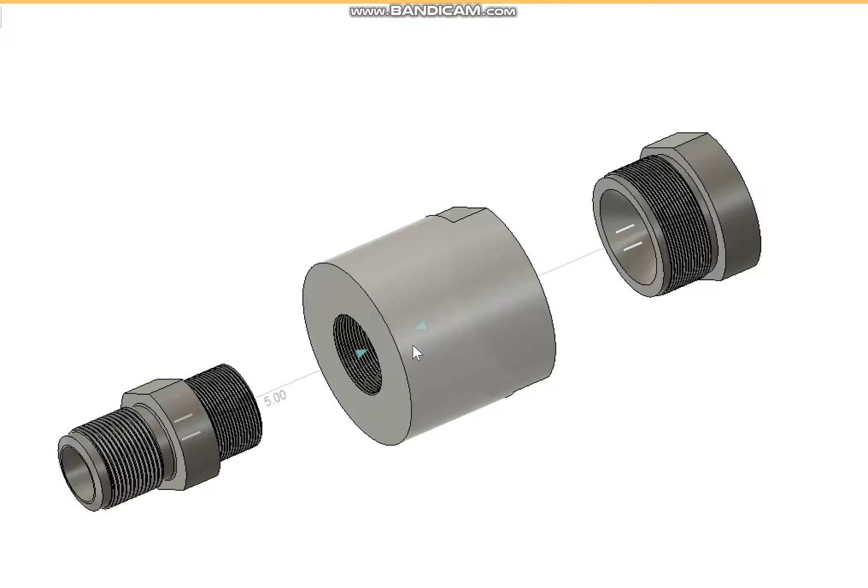So if you quarter, because I need both the male part of the filter pack and a thread adapter, if you quarter the difference between the 1/2 inch hole and the 2 inch thread, the 55 millimeter, you end up with 3/8. So you got a 1/2 inch hole, 3/8 on both sides for the adapter, and 3/8 on both sides for the filter pack. The filter pack then would be 1/2 inch plus 3/8 plus 3/8, so 1.25 inches.

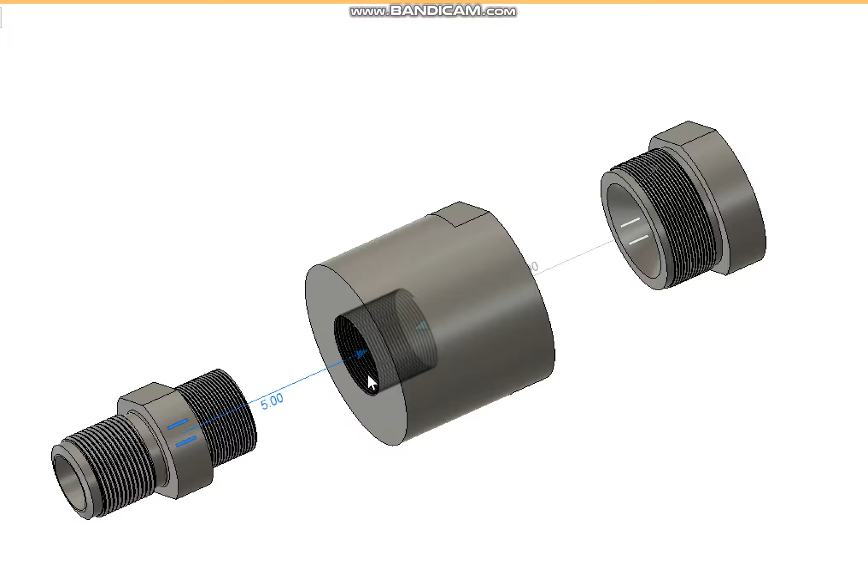So you're going to have a 5-inch diameter piece of steel with a 1.25 inch thread. I was pretty sure that's going to break off. So to get around the problem, the adapter for the machine needs to be a nipple, male on both sides. And then the female goes inside of a universal part that we'll call the filter pack. And then of course the caps have always been interchangeable. So this is what you currently are running on line 10 right now.

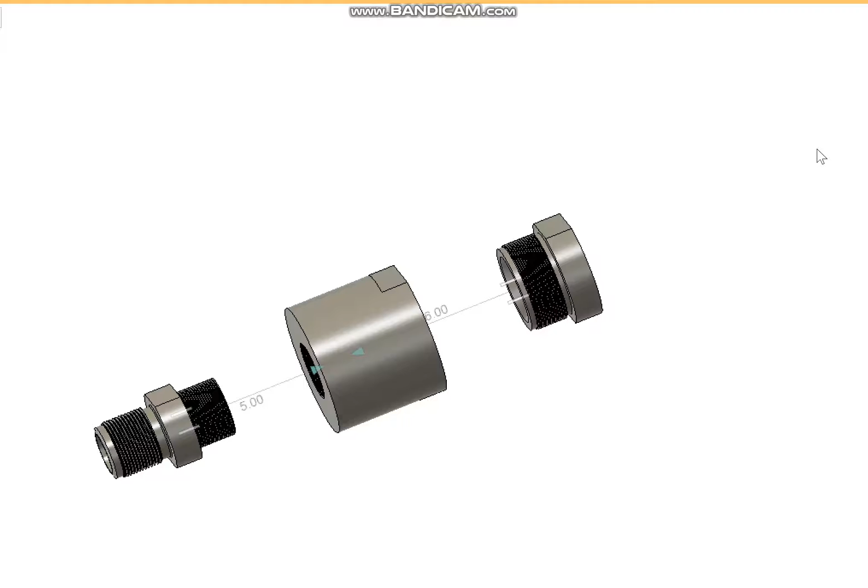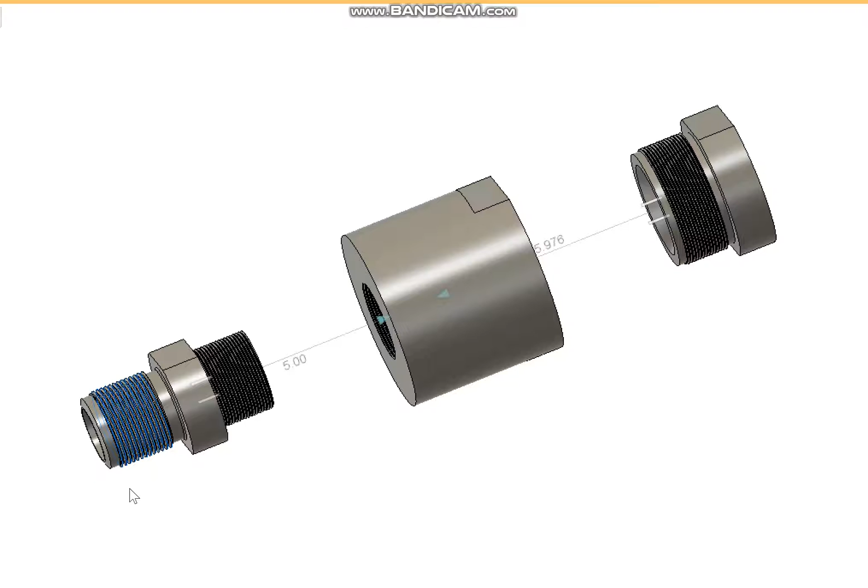And the only difference, I'd like to get some data on how it works. But we know that operators will blow these apart. And when they do, I want it to break here on the universal part so that we can change this and this or repair them or whatever we're going to do. But obviously the part that's individual to the machine, we don't want to stock as many of those. So I really don't want it to break there. And so I would ultimately feel like this thread needs to be at least as strong as this thread.

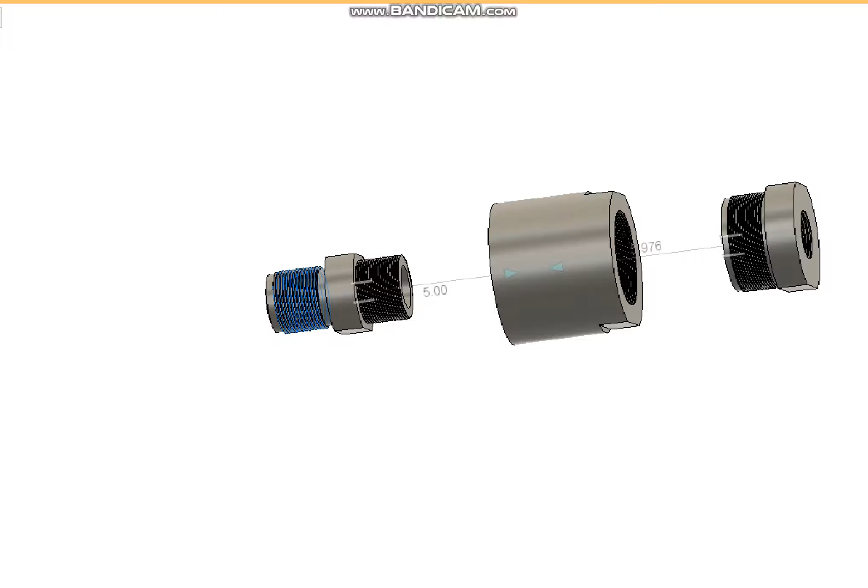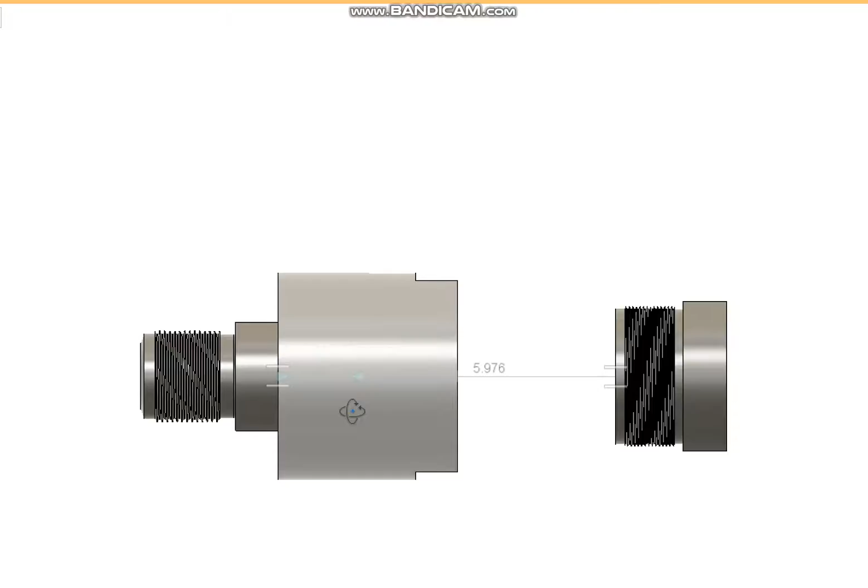And the only reason that I have less threads now on the universal side than the machine specific side is that I stayed with the same length of filter pack. So if I add some material to the filter pack, then of course I can make these threads longer. And I think that would be a wise choice. There's plenty of room down in there. Well, there's not plenty of room right now, but there would be if I just make this longer.

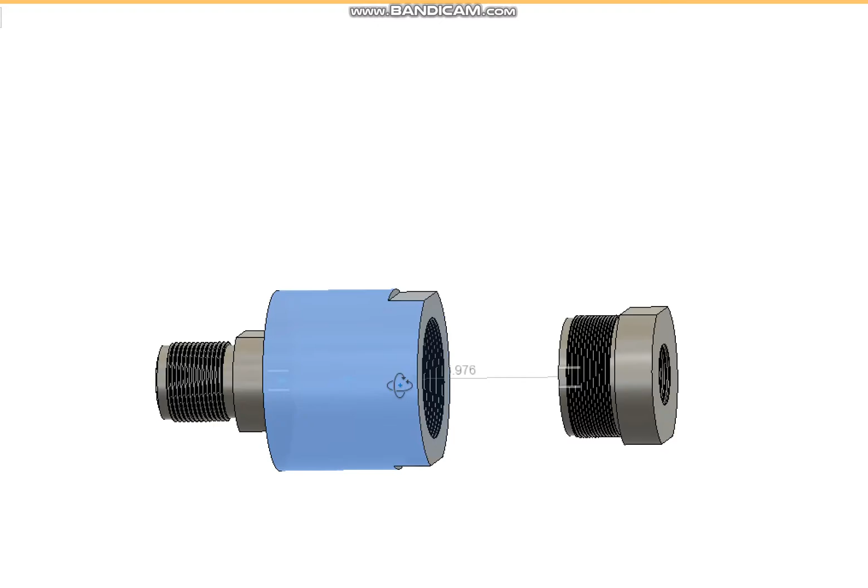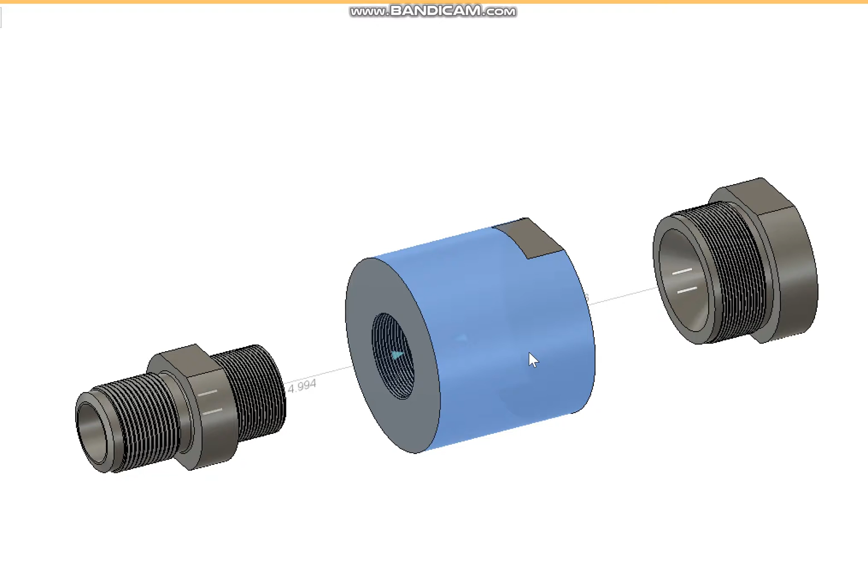So if this design works for you, then hopefully the information I've provided you in this video, plus the fact that you've got one on line 10, and I'll start working on a quote for you so that you have at least one of these adapters for each machine style and one spare, and then however many you tell me of the filter packs, and then the caps, so we can get started on getting you some spares for every machine in the building.